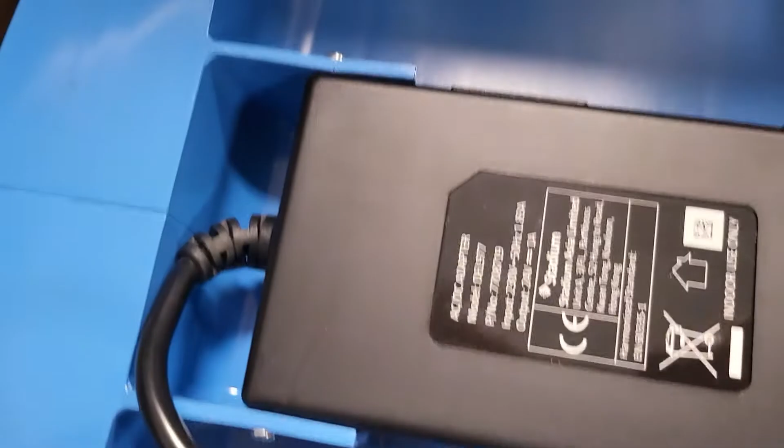And here's what you get in your box. So you got the PIV itself, and I'll show you that unboxed and out on the job. But essentially it comes with a little power adapter, and around this way you can see that. So it's taking the 230 in and it's putting out 24 volts DC at 1 amp to drive this PIV, and that drives the heater module that we'll talk about as well, and also the controls on the faceplate. I'll show you all that on site, but this is as it comes in the box.

So if you need to get it through your loft hatch, these go through even the smallest loft spaces. So if you've got those old houses where they've got a loft hatch that you can just about fit a large fat man through, these will go through as well. Then we've got the insulated duct. I'll show you that as well out on site, but it is insulated, so you can see it's got the foil in there too, so it's going to prevent any of the condensation, or as much as possible.

The heater module lives inside this box here. We'll have a look at that as well. It essentially has got a 400 watt heating element that pulses on and off, and that's kind of tied in to the power pack from here. And then the front module, which is in this box there, and that sits in the ceiling. And you can adjust the temperature coming out of this.

It basically switches it on from a colder loft temperature for a longer period of time, so it'll run more often and increase the ambient air coming out of the loft into the house by about 8 to 10 degrees Celsius, they reckon. So it's not going to start pumping in hot air. That's not how it works, but it will take the edge off the cold air in your loft space in the winter months. And if you're going to get one of these, highly recommend you get them with the heater module.

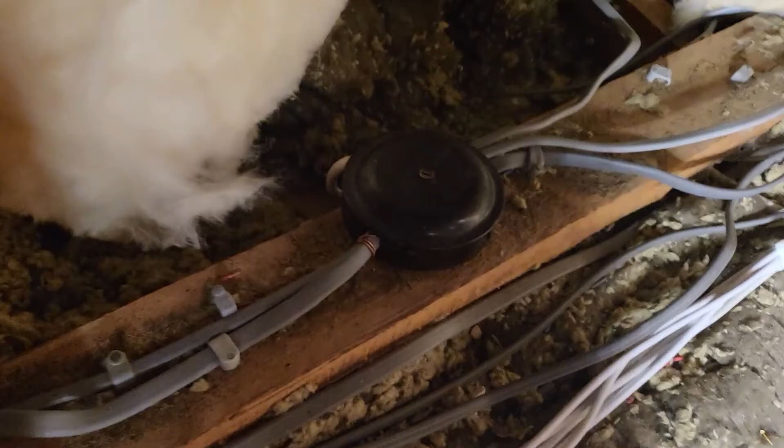You can see Nathan cutting out this board here because this is where we're going to mount the PIV. We've got existing cables all over this loft space that aren't in the best of condition. We'll speak a little bit about that later on. You can see there we've got an open junction box which was energized. So yeah, we've just been careful. We've moved the alarm cables out the way that were just running across there.

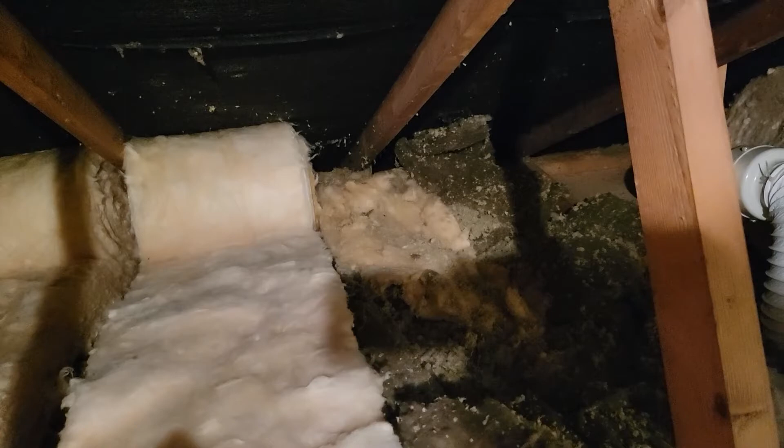This is the loft space, and obviously we've checked this. There's good ventilation into all the soffits. Obviously the customer's got plans to do some quite extensive insulation. So we've had to make them aware of not blocking up all of the ventilation coming into the loft, because the PIV is relying on that to make sure it can inject that fresh, unhumid air into the property. So we are happy with that.

It is a well ventilated loft space, and there's no signs of any rots, leaks or anything like that going on. So that's one of the important aspects of the PIV, that you do check out the loft space and make sure it's suitable.

You'll see it's kind of boxed off that way. There's no access to that other end of the loft. It is still part of the same property, and they believe that that space was kind of made as a temporary room by the prior owners. They've just kind of sealed that off, and it is left as is. So we're having to put the PIV in this particular ceiling space. It's the only spot we had to go at, which I will talk about a little bit at the end of the video when we go through the instructions.

So you can see Nathan there, he's all gloved up with his mask and his goggles and his ear defenders, cutting this out in a bit of a neater way than the people who attempted to install that spotlight. So we've given ourselves a nice clear spot of access to install the PIV within the loft space. So you can see he's just slowly cutting his way through there. And obviously I've killed the audio on this because it is a very noisy oscillating saw.

This is Matthew just marking up the ceiling space below. That's the cardboard template that comes in the kit. As long as you mark this out carefully and get it in the centre of the ceiling space, you really can't go wrong, as long as you cut along your lines. There is a bit of play in there, so you don't need to be especially precious with it, but you know, generally if you stick to the lines, you're not going to go wrong.

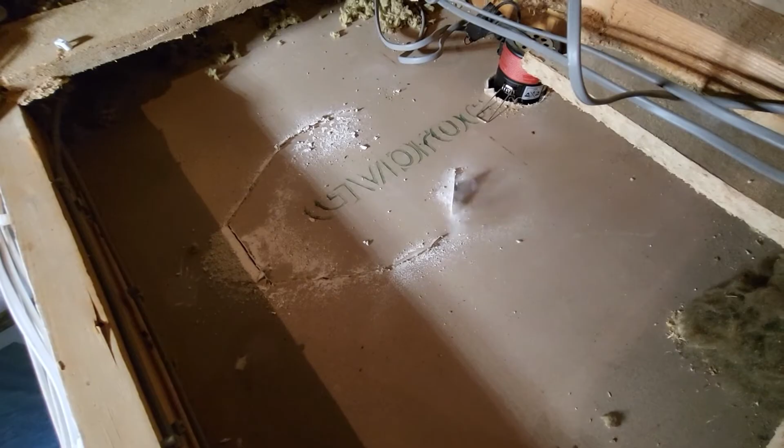I'll speak a little bit in the instructions about the distances from smoke alarms and from your walls. We'll go through that when I go through the instruction manual, but generally if you are running at speeds 2 or 3, you need to be around 400 mil from the wall, which we were here, and if not, you've got the air dams as well. But again, I'll speak about that a bit later on when we go through the manual.

So you can see he's nearly got his way cut through there. He's just been careful and ginger to try and make sure we're not causing ourselves any problems. It might take an extra minute or two in cutting your hole, but by doing so you can save yourself an extra half hour to an hour of patching up. So he's got that cut through there.

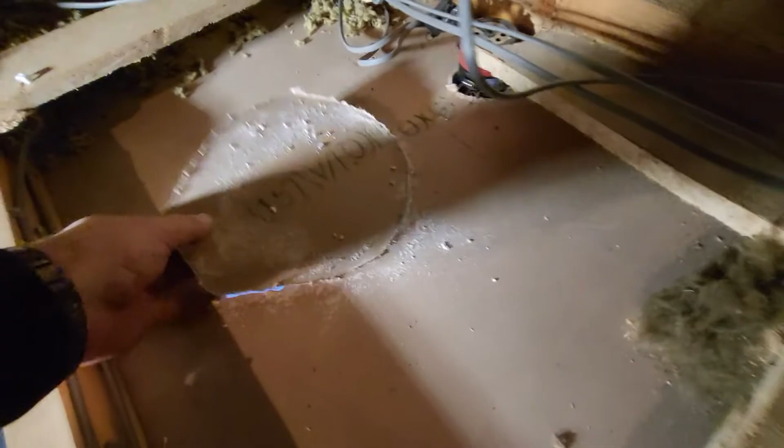I think I'm just going to reach in and grab this cutout. I always put these to one side and tell the customer where they are, just in case they ever decide they don't want a PIV anymore and someone has to come and patch the ceiling up. The cutout is there for them to use.

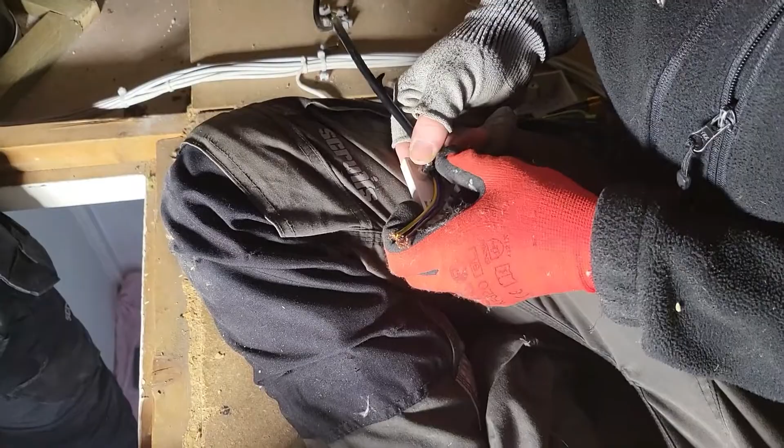Now this is a timber frame we put around the PIVs. You will have noticed that just down there. I'll speak a bit about that in a minute as well. This is Nathan getting the fuse connection unit wired up, and this comes in the kit, so it comes with a 3 amp fuse. Matthew's getting involved in that as well. Now he's making the connection into our feed to the fan. We also need to make sure we get that 2-pole 3mm of contact separation on all poles as well, and I will reference that in a bit.

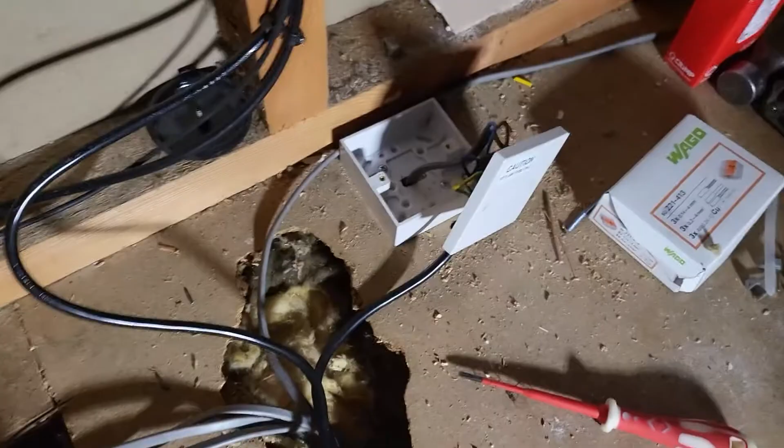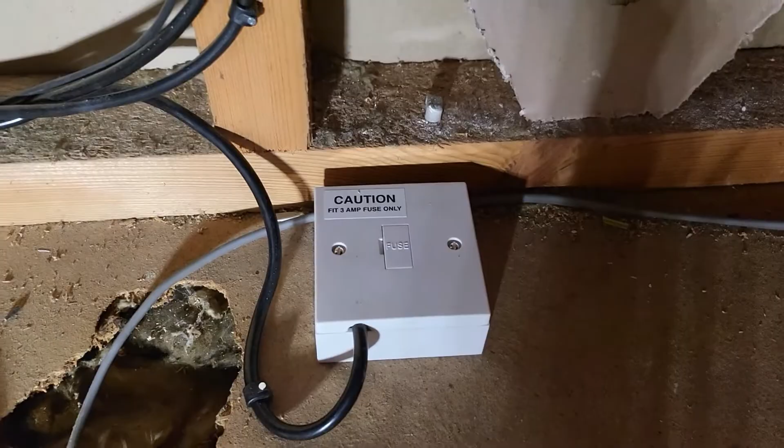But here close to the fan, we're just putting the fuse connection unit, which has got our feed down to supply the fan, and then we've got the flex lead wired into that. So you can see our wooden frame there around the fan. That's to give it some support in the ceiling. It's not very heavy, there's not a lot of weight there, but still we'd rather get as much as we can to fix the grill plate to from below, and also provide a bit of support to the heating element that's sat on top of it.

You see the fan itself is mounted on a cord. We've got that secured across a timber we've installed between the 2 rafters running up to the top. You can use existing timbers or just put hooks in if you wish, but we've tried to be a bit more substantial with that. So we've got it wrapped around the timber, and we've also installed a fall arrest screw in the top, which the hook's gone around. So if that timber was to ever fail due to rot or whatever, it's not going to drop away onto the floor. It's going to be held nice and securely up there.

We've also got the ducting, and again, you need to cut this to length, make sure it's reasonably taut without being too tight. There is a fine line and balance with that, and again, secure it so it's got a nice bend on it and it's not constricted in any way, so the good flow of air can make its way through it.

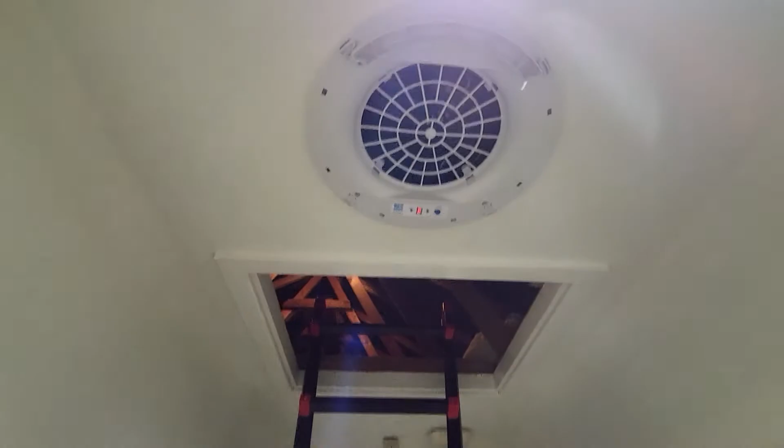And again, you can see there we've popped some insulation around the vent plate just to try and make sure there's no drafts or anything coming through the ceiling and around it. Made good that junction box, and we've tidied up some of the other wiring in the loft as well. But you can see here we've got the vent plate in the ceiling now. These are the speed controls. You can see me adjusting it up, and I'll just go quiet here to see if you can hear it.

So I know you can't really hear anything on there, but essentially it is really quiet anyway. We tend to leave them on speed 3 generally. This is only a 2-bed bungalow, so we've popped it on speed 3.

You can see Matthew's popped the air dam in there just to keep it away from blowing at that light. Really, it's to stop dust and debris or anything getting into that spotlight.

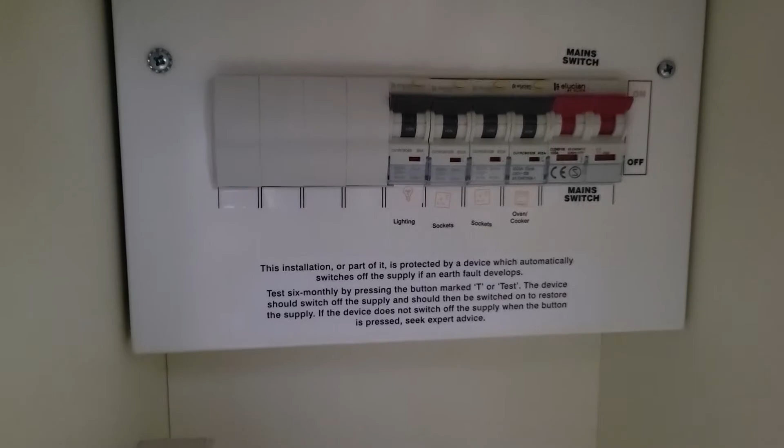This is the Elucian consumer unit someone else has installed. We haven't done this, and again, with consideration of the existing wiring, we're coming back to this board with our cable to power the new PIV, and we're going to put a local 2-pole isolator in that circuit so the customer has the contact separation required as dictated by the instructions, and a new circuit off this board.

So I'm back at the office now, having gone through that install with you out on site. I want to have a little look at the instruction manual just to go through some of the bits and pieces in a little bit more detail. I've saved this to the end because I know it's not for everybody - you just want to see the work and not the bumf behind it.

Let's have a little look. If I just spin you around. And it starts off with the safety information.

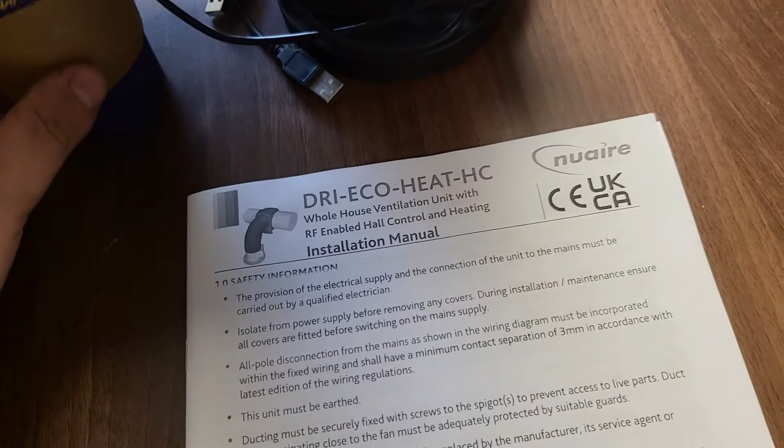So you're looking at your electrical supply - connection to the unit must be made by a qualified electrician. So if you are considering doing this as a DIY install, you will still need to consult an electrician when you come to make that connection.

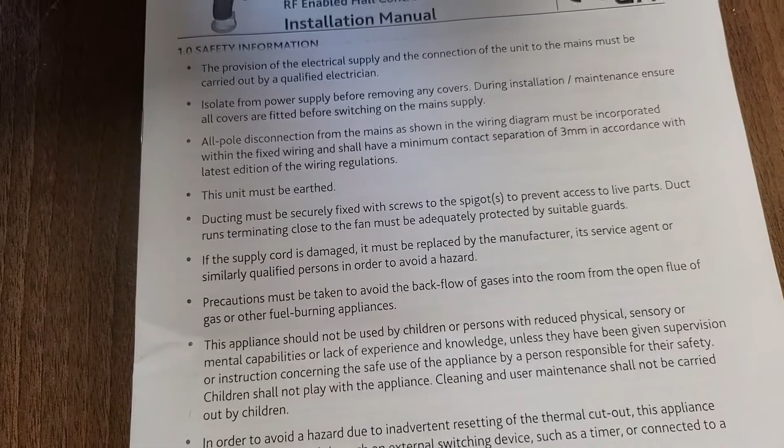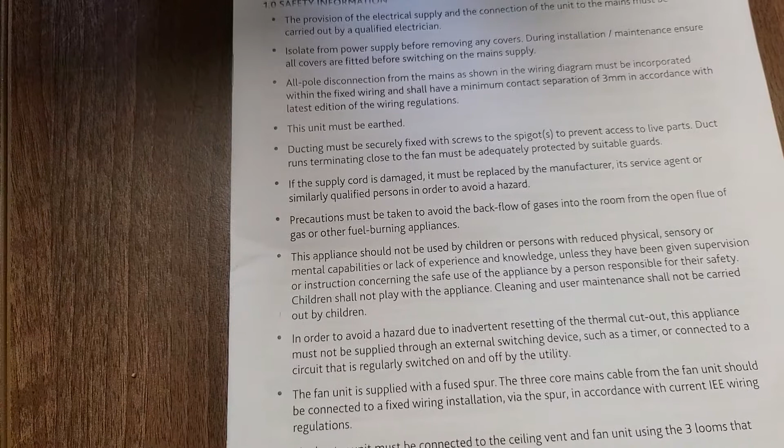It's telling you to make sure you isolate any power, all the basics, that you need 3mm contact separation in accordance with the latest wiring regulations as a form of isolation on these installs, so you must always make sure you've got that. Some people will happily call the main switch to the entire property as having provided that, but really some form of local all-pole disconnection is never a bad idea.

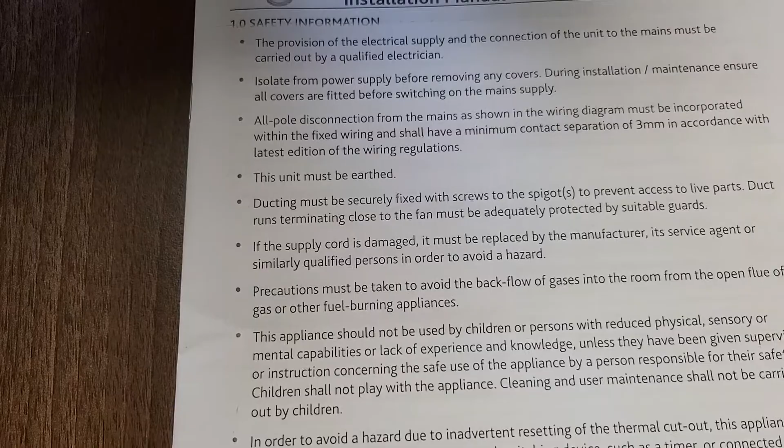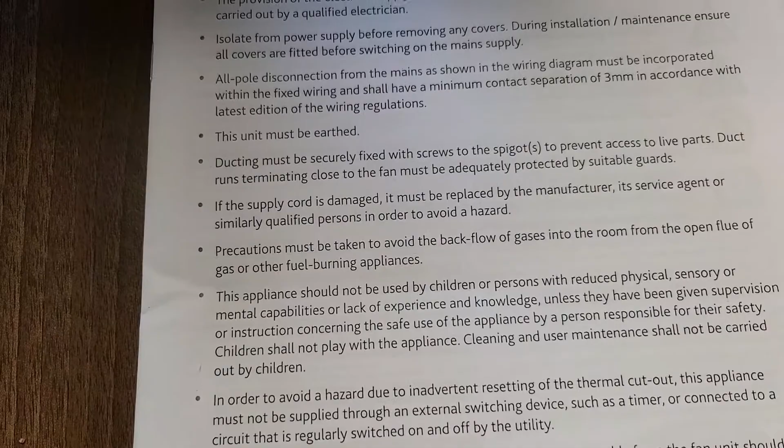This unit must be earthed. The ducting must be securely fixed with screws to the spigot to prevent access to live parts, so that's clearly stated there. And the duct runs terminating close to the fan must be adequately protected by suitable guards. So you need to make sure that you're paying attention to these, that somebody can't go getting their fingers inside any of the bitey bits.

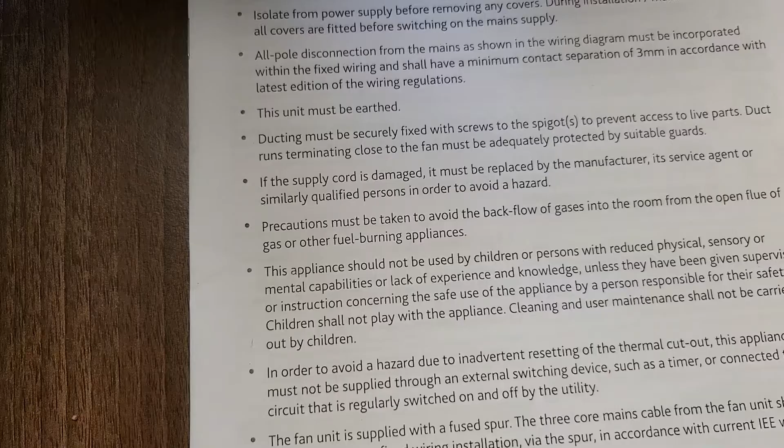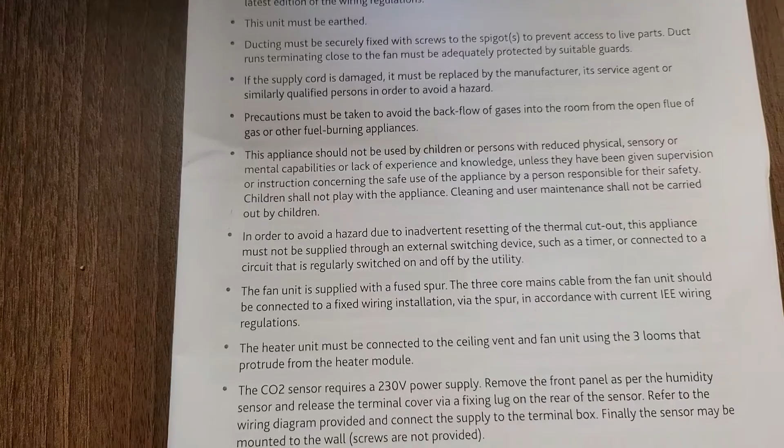So checking that the supply cord's in good order. There's no backflow from any open flue gas appliances, so if you're in a loft space with a boiler, it's well worth considering the inclusion of a CO detector in the system for that purpose. But make sure that the basics are there and you've checked the condition of the boiler itself. If it's of an age where you've got concerns about it, make sure you're having that checked out. Ask to see the service record for the appliance as well.

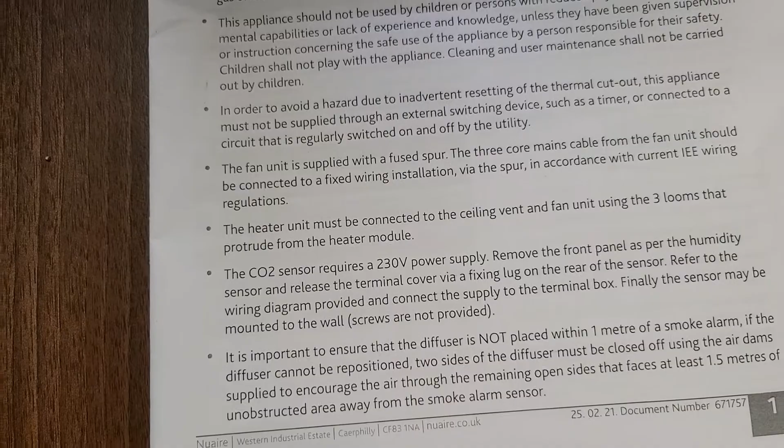Saying don't let kids use it. The fan's supplied with a fused spur, so you get that spur in the product itself, but remember about your all-pole isolation. You also get the cable, which we've shown you in the video as well.

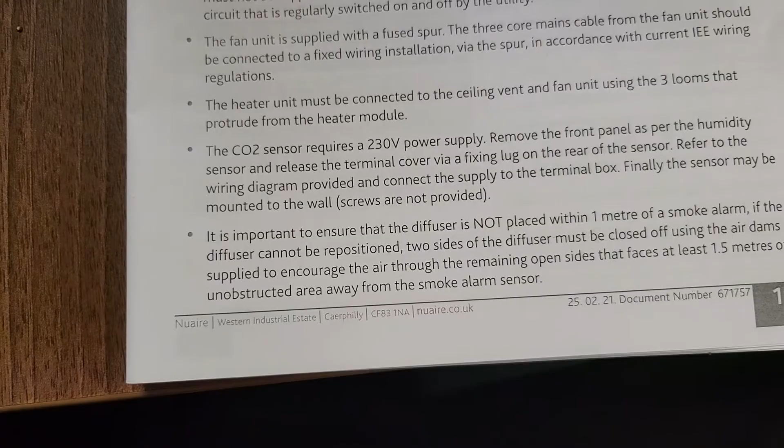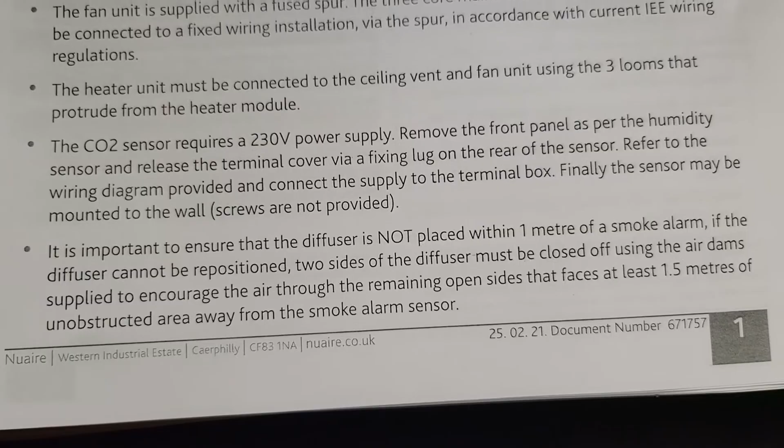Explains about the CO2 sensor and also about smoke alarms, and that's the important one. So don't put these within a metre of a smoke alarm for obvious reasons. They want to be picking up smoke that might be accumulating in the room ceiling space and not have that dispersed away from it. Equally, you're not blowing dust potentially all over the sensor from the PIV itself and rendering it useless. So make sure you do pay attention to that. Sometimes it's tricky if you've got a small loft space, a small ceiling space to mount it on.

And again, here looking through it, I'm not going to read through all of this, but it's basically all of your important information. It's giving you about PPE, so it's quite detailed there if you want to read through and follow this.

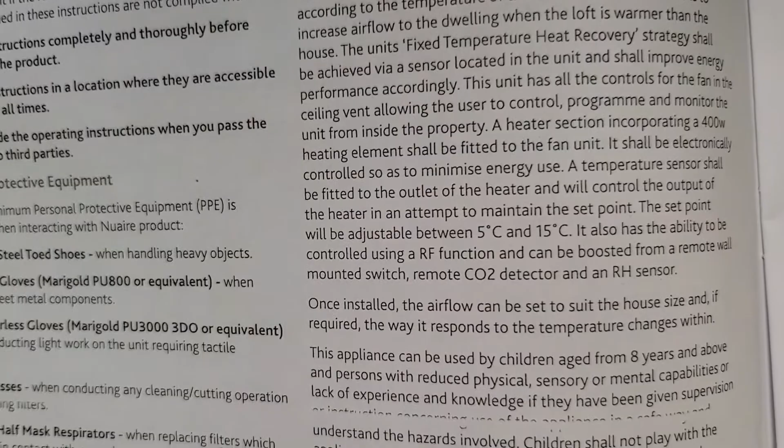It says here a temperature sensor shall be fitted to the outlet of the heater and will control the output of the heater in an attempt to maintain the set point. The set point can be adjusted between 5C and 15C.

It also has the ability to be controlled using an RF function, so you can get remote control switches for these that you can put in the hall and adjust all of these settings without needing to access the front plate. You can see it does say it's a 400 watt heating element, and it's electronically controlled so as to minimise its energy use. It's not just running at that 400 watts continuously, so that's stated on there.

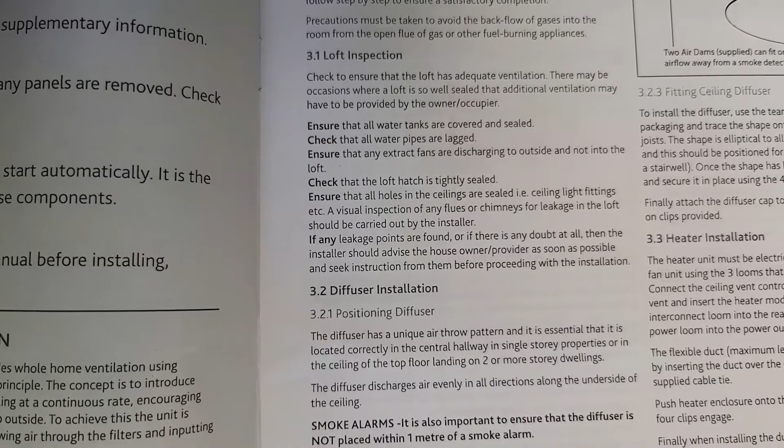It tells you about the mechanical installation, so how you should avoid the backflow of gases. Again, you've got to check the loft - sometimes if a loft is so well sealed, you might need some additional ventilation to get that airflow through the loft.

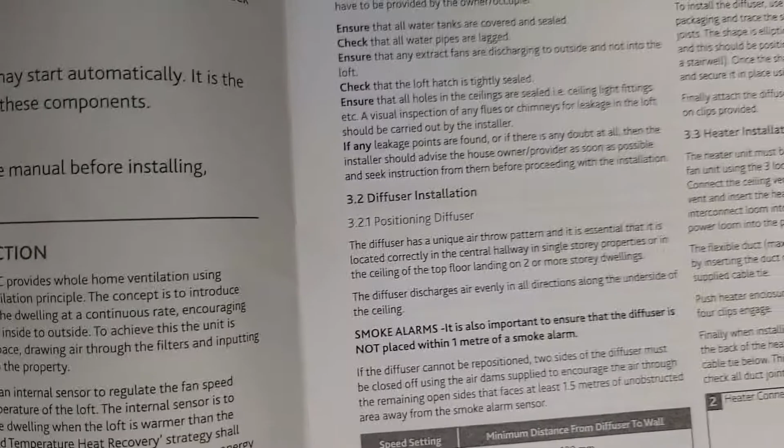Ensure that your water tank's covered and sealed. Check all water pipes are lagged. Ensure that your extract fans are discharging to outside, because if somebody's just put a bathroom fan straight into the loft space, as is reasonably common, you're just going to start blowing all that moist air back into the house and achieve absolutely nothing.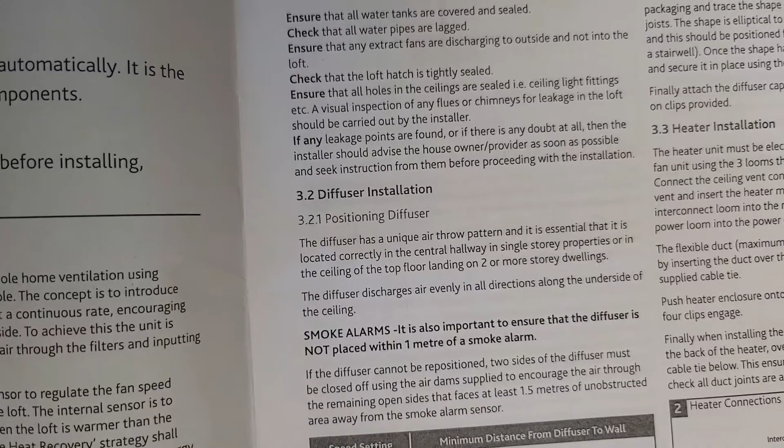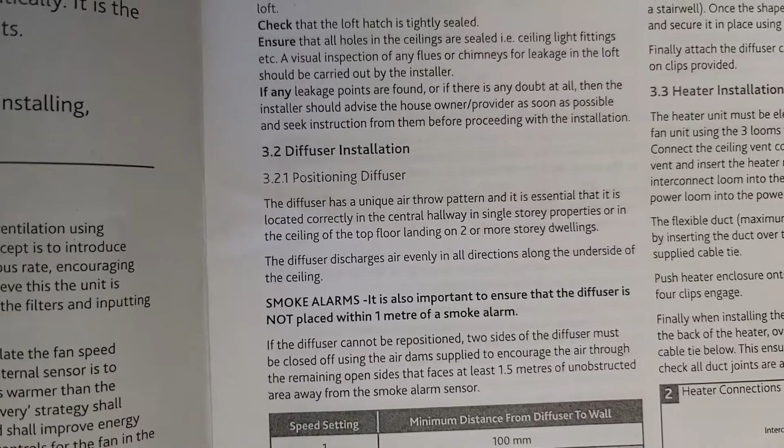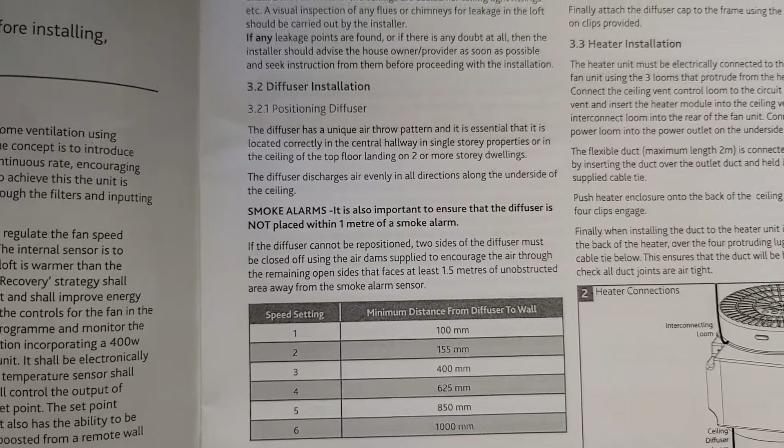You need a good seal on your loft hatch, so make sure you've got that. All holes in the ceilings are sealed - if you've got spotlights, make sure they've got the little foam bungs on the back face of the spots, or that the holes are cut nicely around the light fittings and it hasn't been done by somebody's teeth. So yeah, it's just checking the basics really.

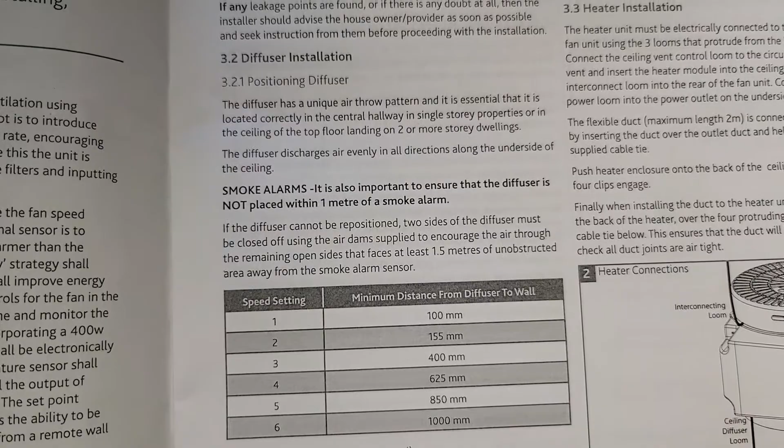Make sure you have a good sound seal between the loft space and the house, and also that you've got good airflow in there. Now the diffuser has a unique air throw pattern, they call it. It's essential that it's located in the central hallway in a single storey property, or the ceiling on the top floor landing on 2 or more storey dwellings.

You can get these products for more storeys - they have a specific version of this, I think it goes up to 5 storeys, so you can get those as well, but this particular model is just for up to 2-storey houses.

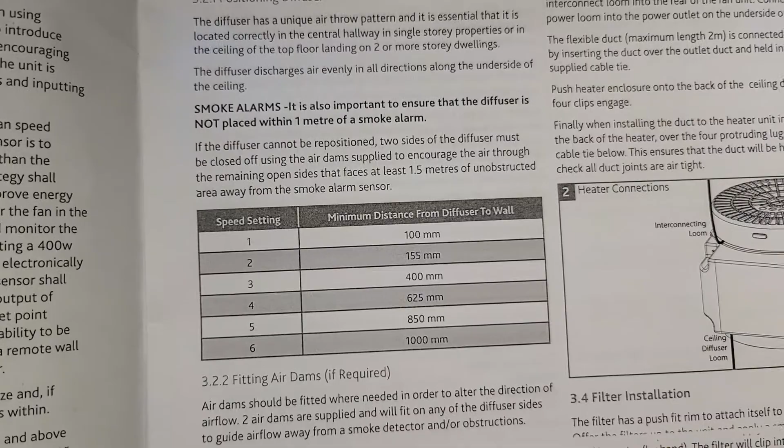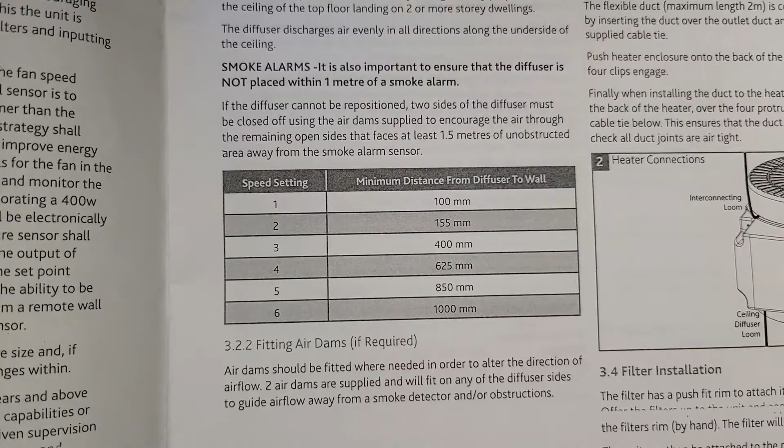The diffuser discharges air evenly in all directions, so it's important to get it positioned as best you can. Obviously some ceiling spaces are the size that they are, and you can use the air dams to try and direct the flow of air in a more sensible manner, but ultimately as long as it's blowing into that ceiling space, it will naturally work its way through the property.

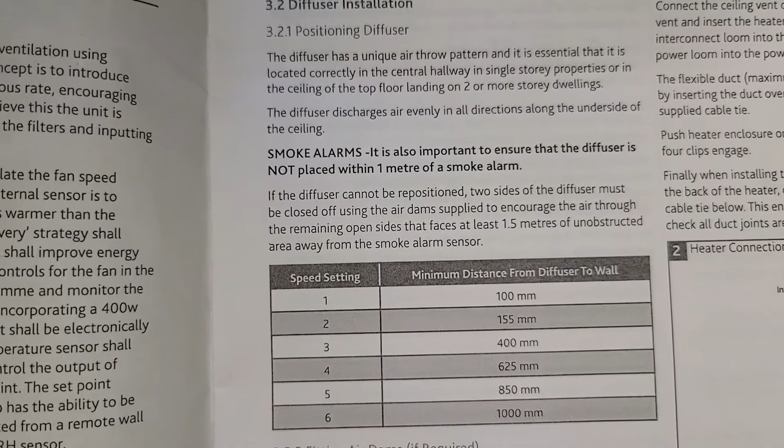It's saying here, if you need to put a smoke alarm within a metre because you have got that problem on the ceiling space - and really we would never do this - it does say you can use the air dams to try and deflect the air away from the smoke alarm.

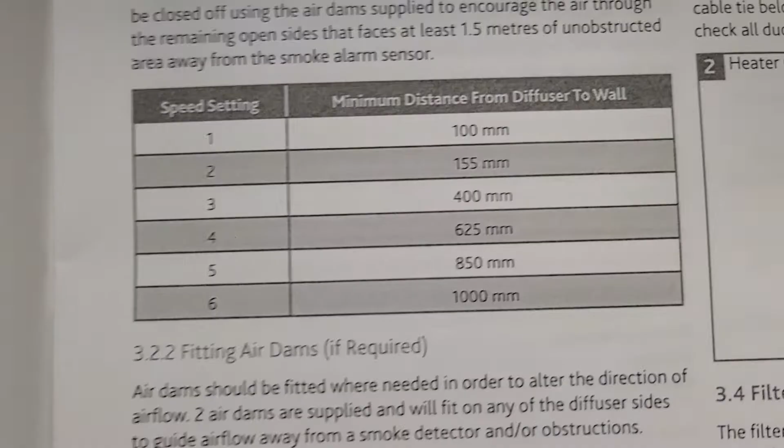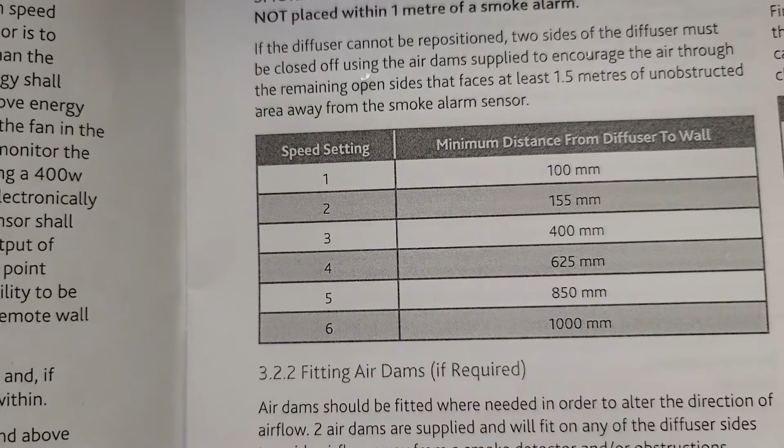Wouldn't recommend that. It says here about the speed settings and your distance from the wall, and again you're going to be restricted sometimes by the ceiling spaces available to you, but generally if you're on speed 3, which is most common, you need 400 mil to the wall if possible, and if not, you can use the air dams to deflect the air in a different direction. Really that's just to avoid blowing dust and debris at the same spot of a wall continuously - you imagine that air circulating, you might start to see staining and such. So that's what that's about.

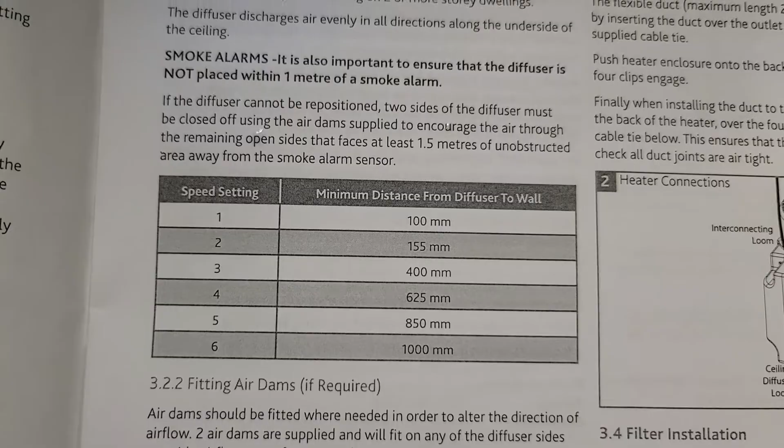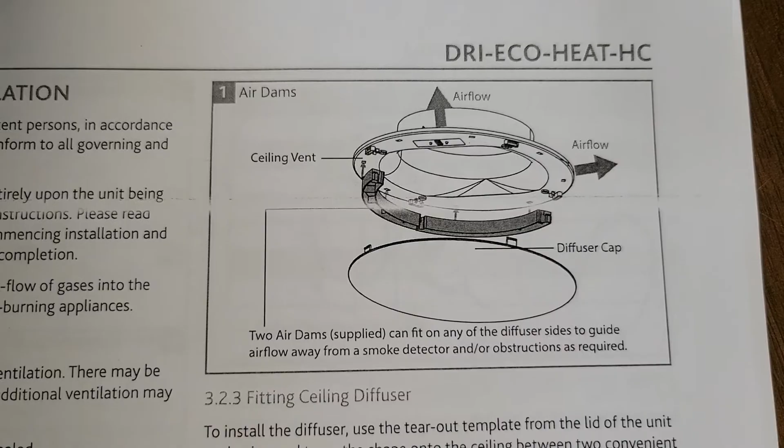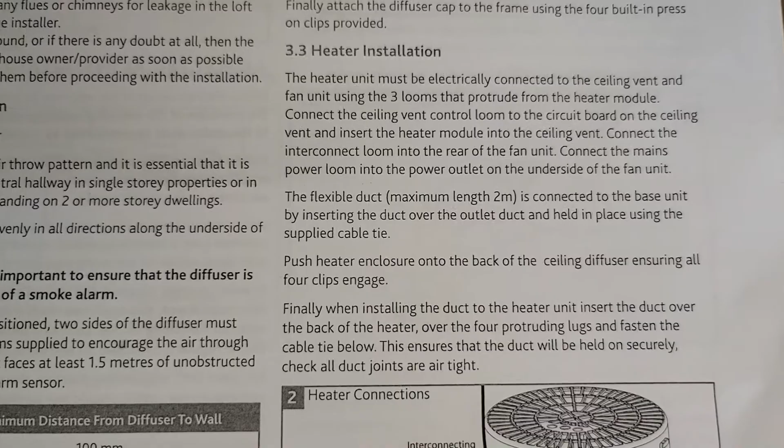Again, you've got explaining how to fit the ceiling diffuser to the ceiling, and there's a diagram there about the air dams which shows you how that can block off the flow of air. You get a template, as we showed, to mark the ceiling out, which makes it easy to install. It explains about the heater, that it has to be electrically connected to the ceiling vent and fan using the 3 looms - there's the 3 looms I've shown you on the video and how they install and link between all of these products. And the flexible ducts - make sure you're pulling it reasonably taut.

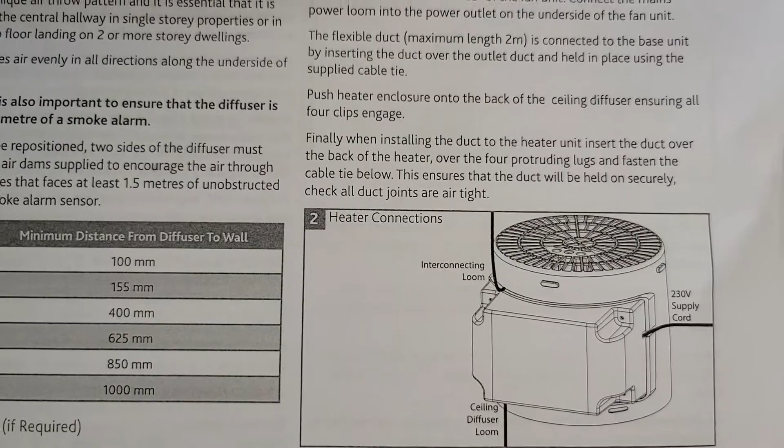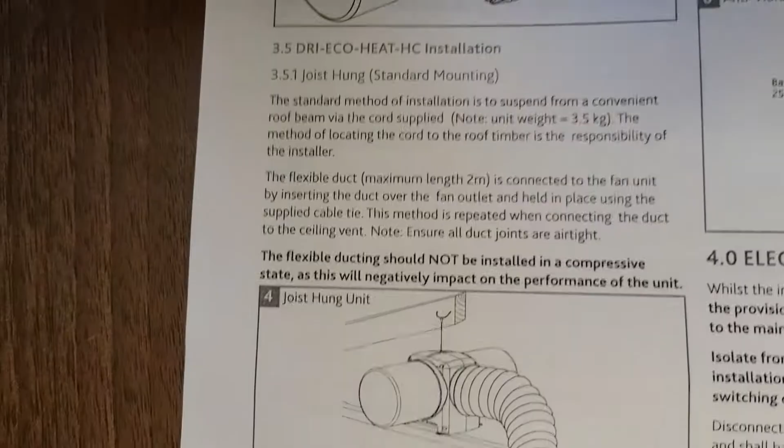It says the standard method is to suspend it from a convenient roof beam with the cord supplied. It only weighs 3.5 kilograms, so it's not particularly heavy, and the method of locating the cord to the roof timber is the responsibility of the installer. So if you've got some especially flimsy timbers, you might want to think twice about that.

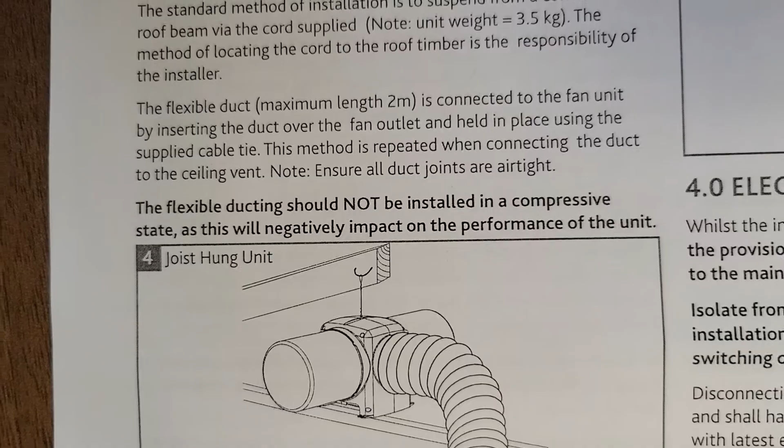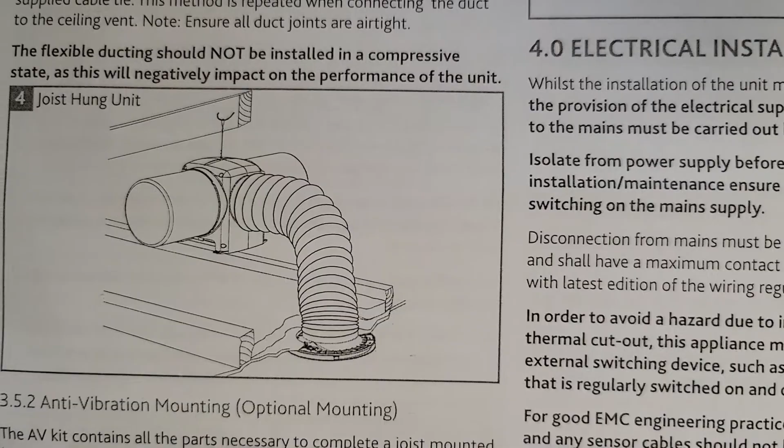The duct is 2 meters long at its maximum, so you have to drop that over and attach it on with the cable ties, and don't forget your screws on the heating element if you've used a heat model, because you will need to have that access by means of a tool because of the prongs on the heating element.

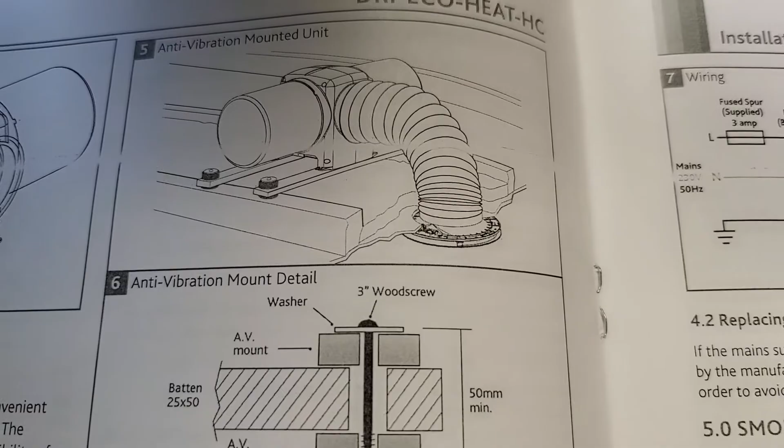If you are going to mount it in this manner, across timbers, you can do that. You just need the anti-vibration mounts, and that's really, as this is running, it does create a small level of vibration. So if you use the mounts, it stops that being a noise nuisance to the occupants of the property. So again, you'd use a couple of battens and make sure you're doing that.

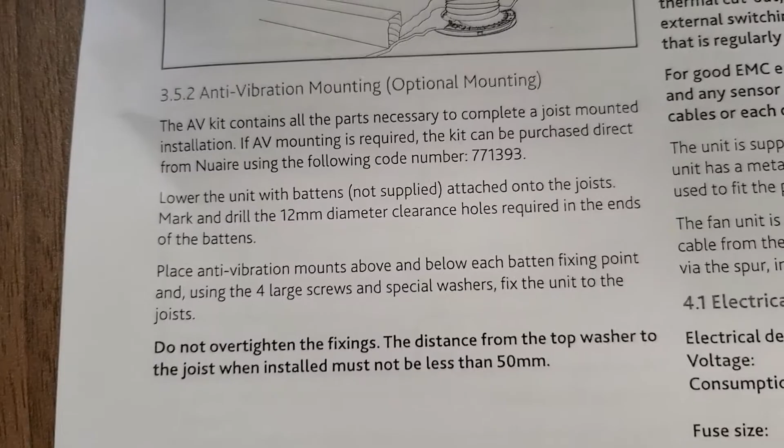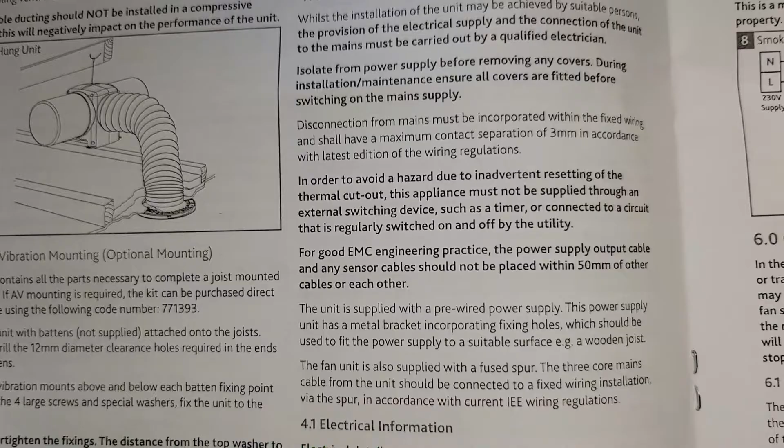The electrical installation, again, it goes on to talk about using a suitably qualified person and how to go about considering that. In avoidance of automatically resetting the thermal cutout, this appliance must not be supplied through an external switching device, such as a timer, or connected to a circuit that is regularly switched on and off by the utility. So that's something to keep in mind.

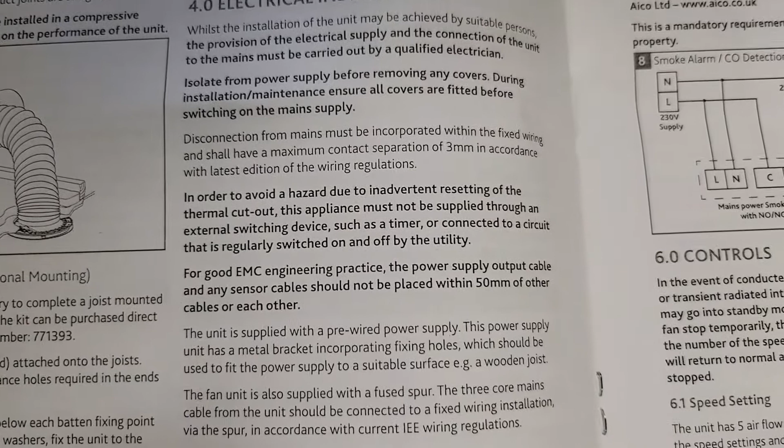If the thermal cutout operates on the heating element, it is reset by powering the unit off and on again. So if that's likely to be something that's done without intention, you need to be mindful of that.

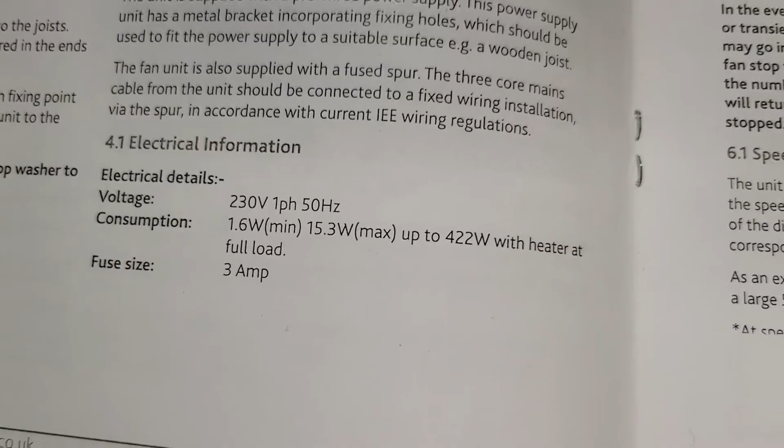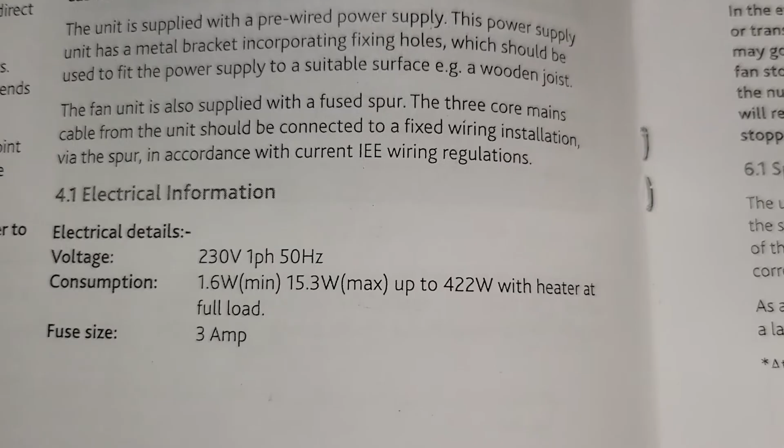And again, just telling you about the loading on it. So your consumption is 1.6 watts minimum, 15.3 watts maximum, and up to 422 watts with the heater at full load. But remember, that is just a pulsed heater, it's not constantly drawing that current even when it is in use. And you've got your fuse size at 3 amps.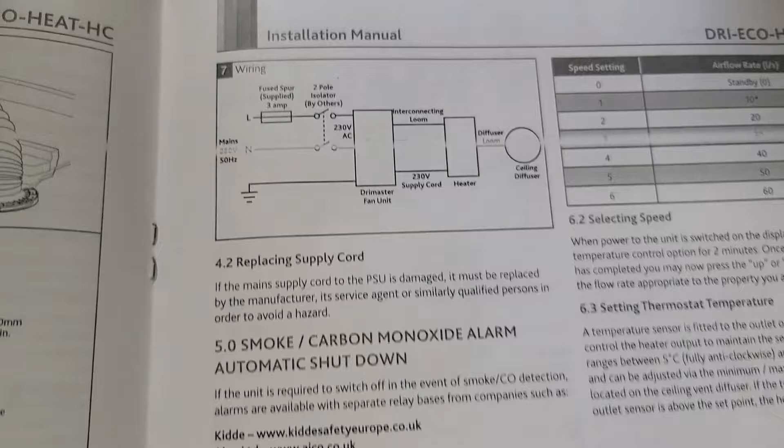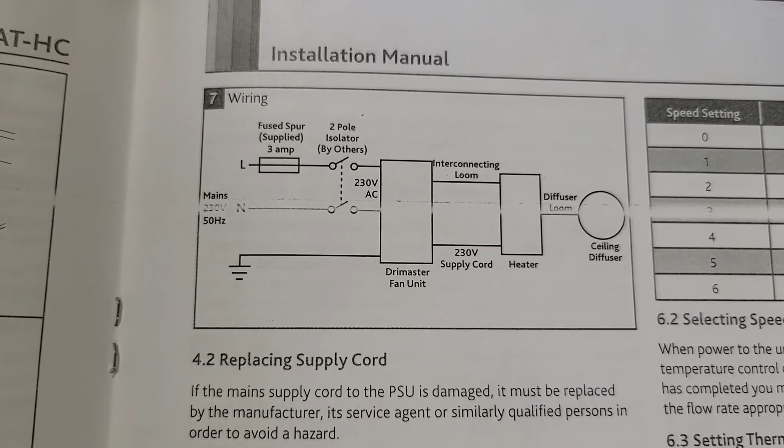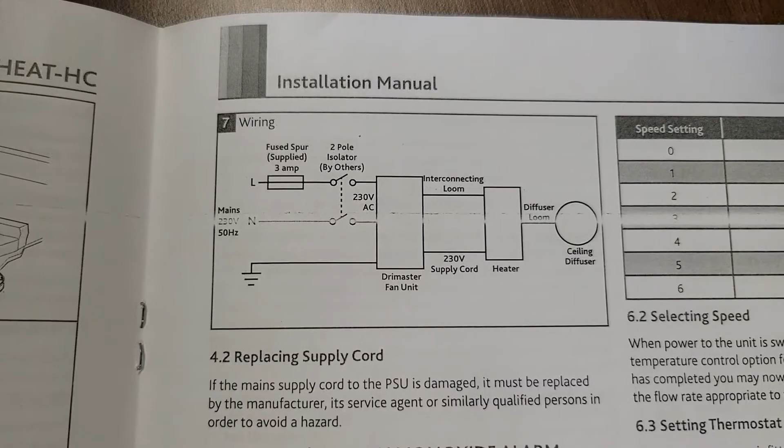So there it'll show you the wiring diagram. You've got your fused spur that they supply in the kit. You need your 2-pole isolator as well in circuit. You can put that after the spur or before. You could even include it into it if you wanted to swap out that 3 amp spur that comes with the kit. You've got the whole range of options there, and however you wish to achieve that electrically is up to you. But do make sure you've got that provision to make sure you're keeping safe.

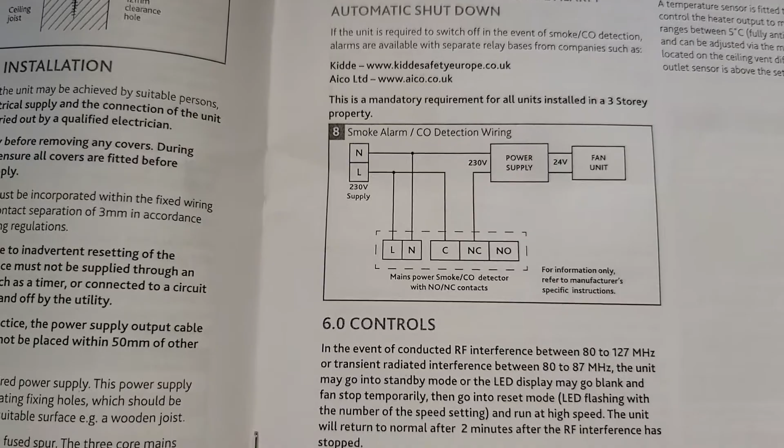And it'll actually say there, look, 2-pole isolator installed by others. So that's good. And then it talks about the smoke alarm and how you would wire that in, see smoke alarm for if you're wanting to shut the fan down in the event of some carbon monoxide being detected. And the speed selections.

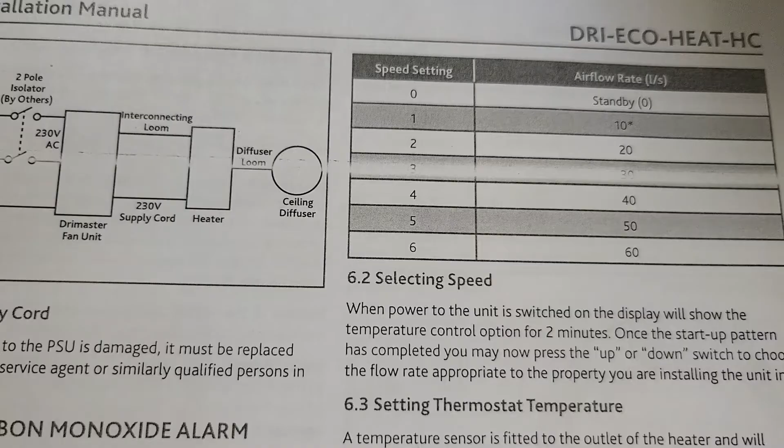So again, generally, I find speed 3 is the most likely speed you're going to be using. But on some bigger properties, you might want to use a higher speed. And if you're trying to clear out an especially bad case of condensation, you might want to set it a bit higher as well.

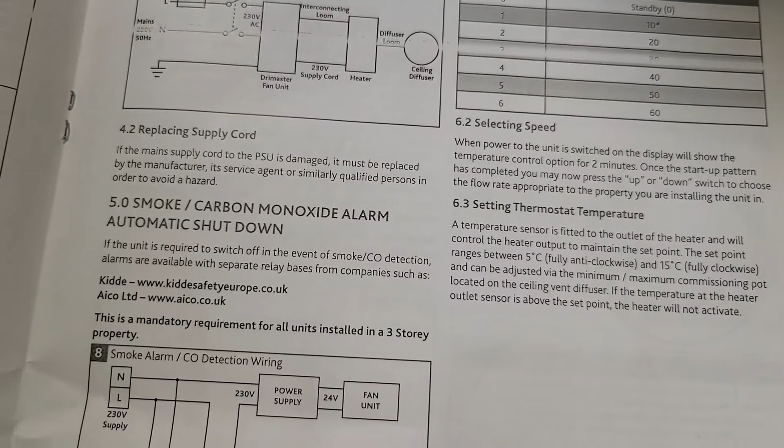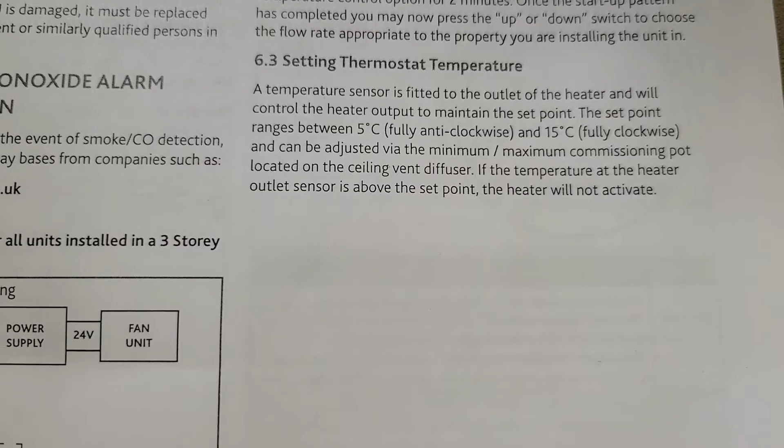And the temperature, it says here, and again it explains between 5 and 15 degrees for your minimum and maximum commissioning pot located on the ceiling vent diffuser. If the temperature at the heater outlet sensor is above the set point, the heater will not activate. So you're just kind of adjusting the duration it might be on for.

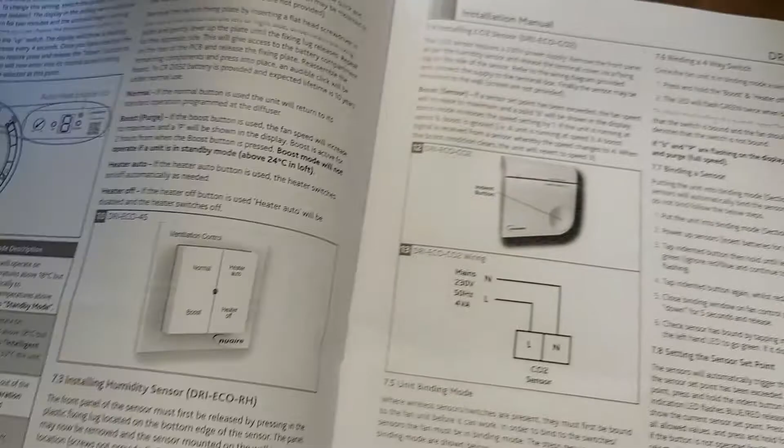And again, it tells you how to adjust the temperature. There's the QR code on there, that's on the front. So if you're a user of these, you can scan that and it will take you to all of these instructions. These are some of the ancillaries you can get.

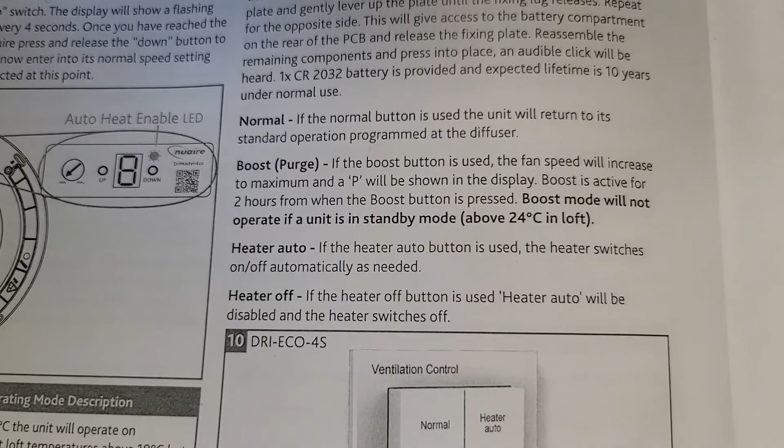So we were talking about the wall plates, and these are wirelessly linked to the product. They don't need hard wiring, but it's how you can turn the heater on and off, or have it on auto, or boost it if someone's had a shower and there's a large volume of steam that you're trying to clear more quickly, or you've been cooking or whatever. You know, you can have these controls fitted as well.

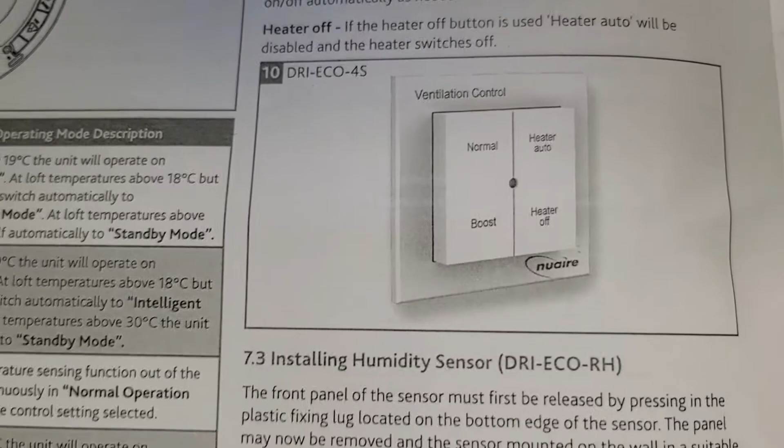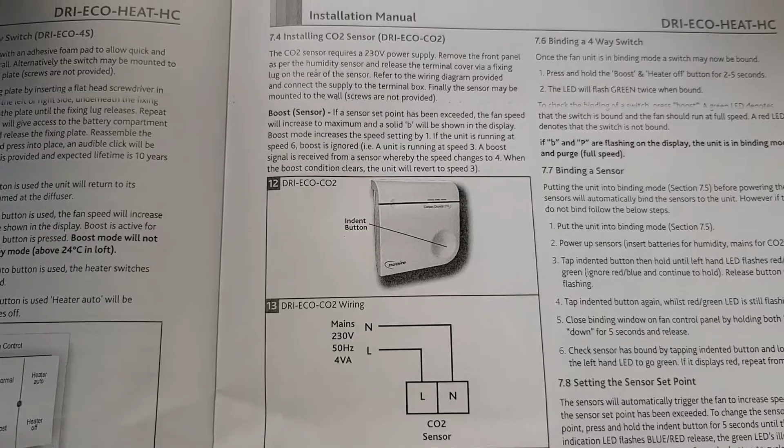Generally, they work perfectly just on their own, looking after themselves, but some people like that. And again, you've got your boost sensor that you would need for that. So there are some additional products you're going to have to install if you want to go for this kind of control. And it talks a little bit about those within the instructions there. That's kind of it. There's the warranty. So as long as you use approved installers, you get a 7-year warranty.

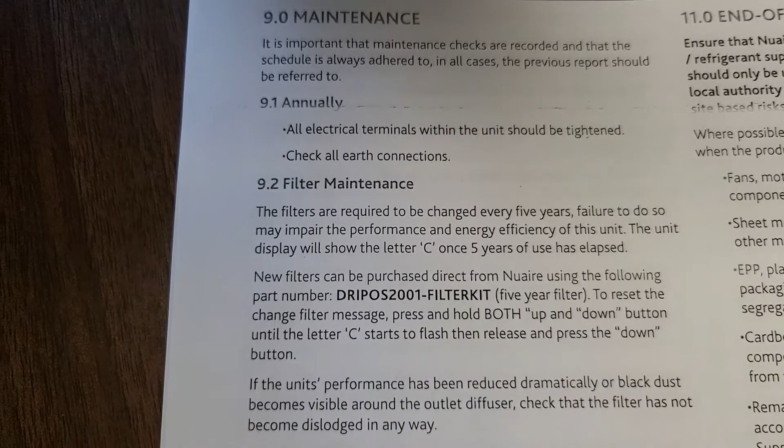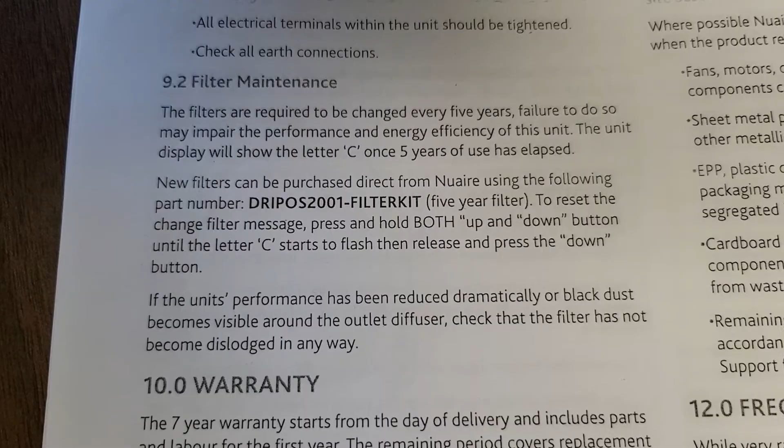The maintenance that you have to do, so it's saying all electrical terminals within the unit should be tightened annually, and check all your earth connections. So it is calling on a bit of maintenance there from an electrical point of view. And the filters, it says, would need to be changed every 5 years or so, and it displays a C on the control module when that time has elapsed.

And then you've got your frequently asked questions, which means what some of the fault codes might mean, or if it's not running, and your end of life recycling instructions. So it is quite a detailed instruction, which is really good. I think it's important that manufacturers do make clear how these things should be installed, what you're trying to achieve through the course of the installation, and also that your ongoing technical support in terms of using it is there for your customers.

And the fact they offer a 7-year warranty on this product is a pretty strong indication that they're quite confident in the quality. And we've been approved installers of these products now for over 7 years, and I don't think we've hardly had a callback to a single one, is the truthful answer. I guess they're quite basic in the way they work.

Some of the earlier models, the PCB boards that mounted into the grill that pushes up to the ceiling, didn't have a cover on, and they tended to collect dust, and they would occasionally cause a bit of a problem where it upset some of the electronics. But now they have a plate on there which stops that from happening. I think we did have a callback ages and ages ago, which was due to dust settling on that PCB board. But yeah, loads of these have gone in, not had an issue, really good quality.

I hope you found this video useful. We've tried to make sure we follow the intent of these manufacturers' instructions, and that the customer has now got a high quality home ventilation system that is going to help them get rid of any condensation forming. And time will tell on that. It takes a couple of weeks or so, we usually advise, to start drying out all of the plaster work.